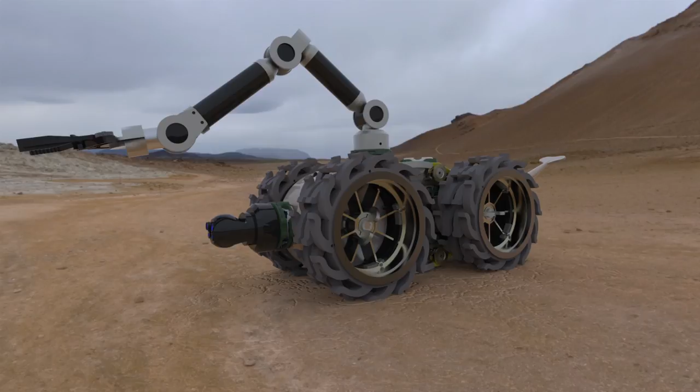Solid Edge ST8 strengthens its industry leadership and efficient 3D product design. This latest release further integrates synchronous technology into proven large-scale assembly modeling techniques.

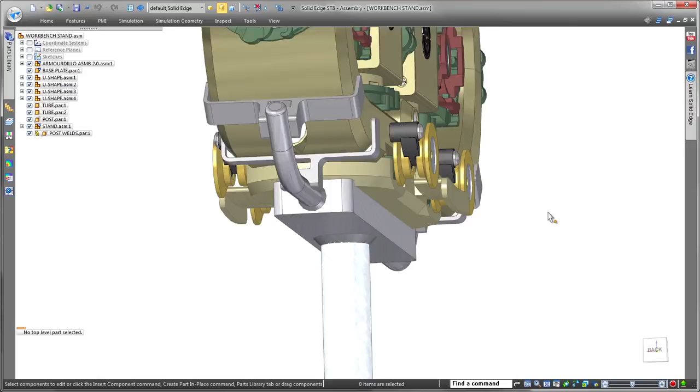In this demonstration, we'll make several changes to a workbench stand supporting a recovery robot's chassis. New time-saving file open functionality identifies top-level assembly files, letting you quickly retrieve the overall assembly without having to search through a long list of subassemblies. Here we'll open the top-level workbench stand assembly.

Leveraging the power of synchronous modeling speeds design changes. To stabilize the workbench fixture part, we'll widen its base just by dragging its side face, and we'll define a small offset to get an exact fit.

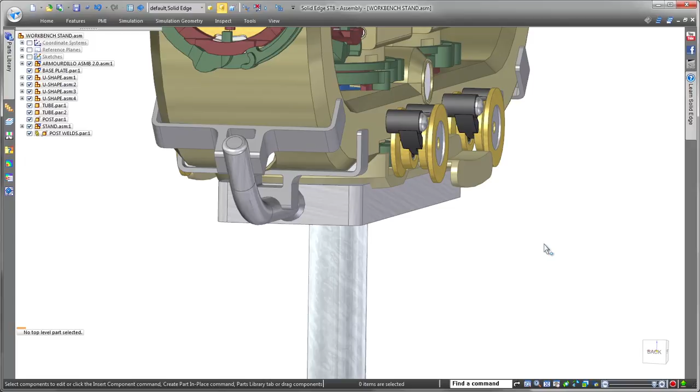Solid Edge specializes in providing all the tools you need to work on a part within an assembly. We'll activate the base plate part to implement some changes. Notice how Pathfinder indicates your active position within the assembly structure.

Here, we want to remove material from the base plate to ensure a tight fit between the stand and robot chassis. We'll subtract material using the bottom of the chassis.

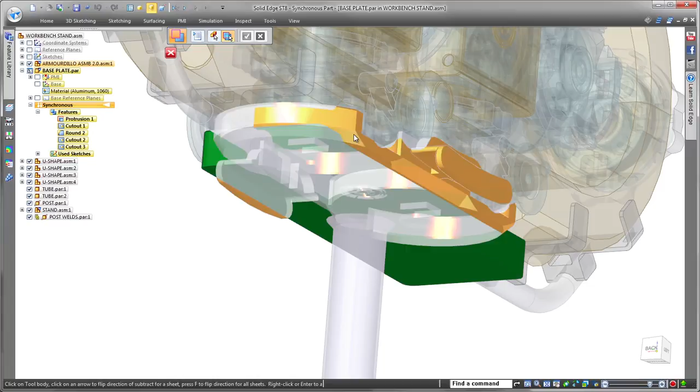Access to the top-level assembly components was crucial to get the correct result. Notice the result after removing material using the top-level assembly components. A perfect fit. This approach produces accurate results and maximizes your productivity.

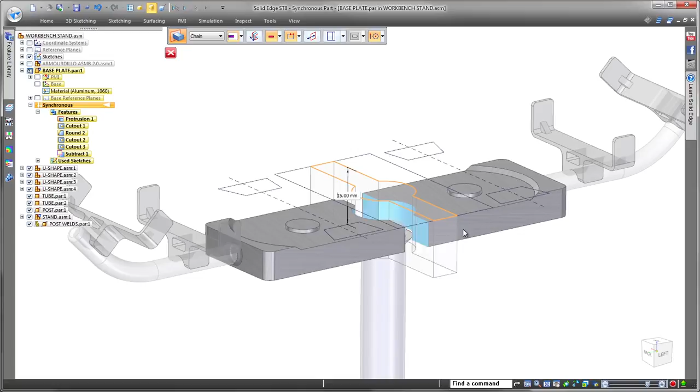Design reuse averts time-consuming and costly model recreation, so we'll make use of geometry already present in the top-level assembly. Watch as we use sketches from the workbench stand to create a relief pocket on the base plate and remove unnecessary features. Finally, we'll add some rounds to remove sharp edges and finish the base plate.

With Solid Edge, working on subsystems and components within a large assembly is efficient and very fast.

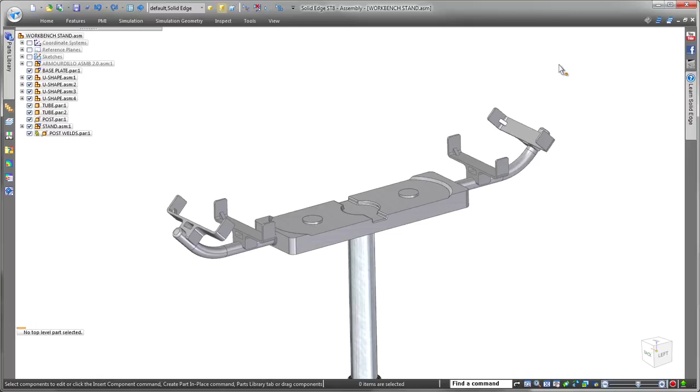Streamlined weldment design is delivered in Solid Edge ST8. The ability to create weld beads within the part environment gives you flexibility with the use of standard weld bead commands, part modeling techniques, or a combination of the two.

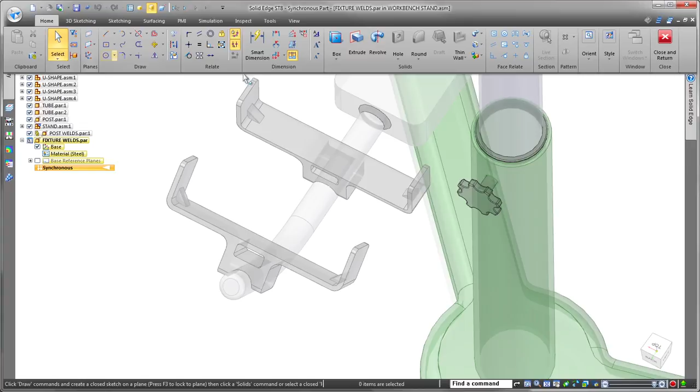With weld beads defined in the part environment, you have full control of the material definition, appearance, and access to their mass properties. We'll continue to work in a top-down design scenario, as this gives easy access to the assembly components. Here we'll create weld beads between top-level components while in the part environment.

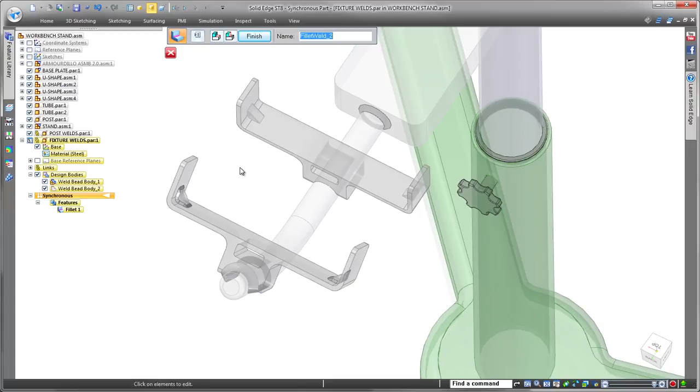Their material is defined in the part, not the assembly. Now that we've applied weld beads to one component, we can expedite the welding process to the other side with the use of duplicate part. Now that's easy, it's fast, and it greatly streamlines the welding process.

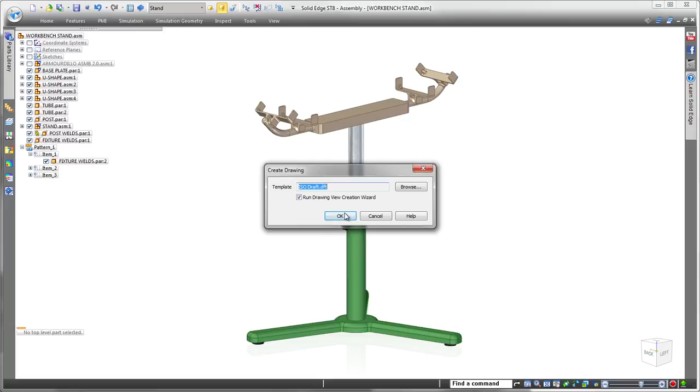When you need to efficiently document your weldment scenario on a drawing, Solid Edge shines. Watch as we place standard and auxiliary views with minimal mouse clicks. We'll apply a cutting plane to the front view, and from that cutting plane we'll pull a detail view to note information about the weld beads.

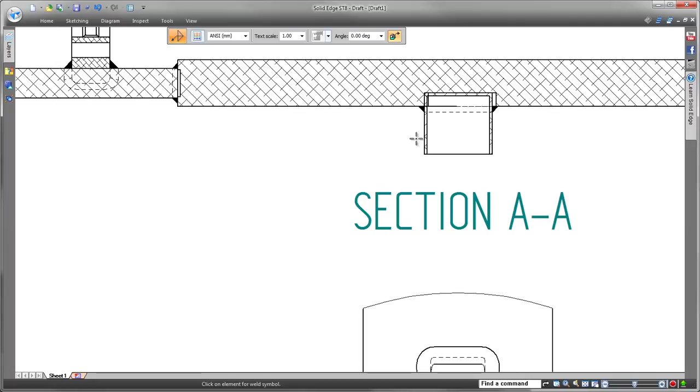Since we can extract weld bead information directly from the model, we save time and cut costs by avoiding duplication of effort. If a design change is approved, it'll be reflected throughout Solid Edge.

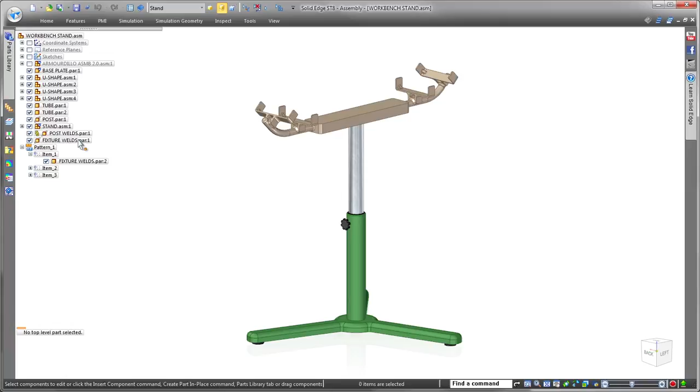Watch as we return to the assembly and increase the weld bead size between the post and fixture. Back in the draft environment, we're notified that a dimension moved, but also notice in the parts list the weld bead weight and cost also reflect the changes.

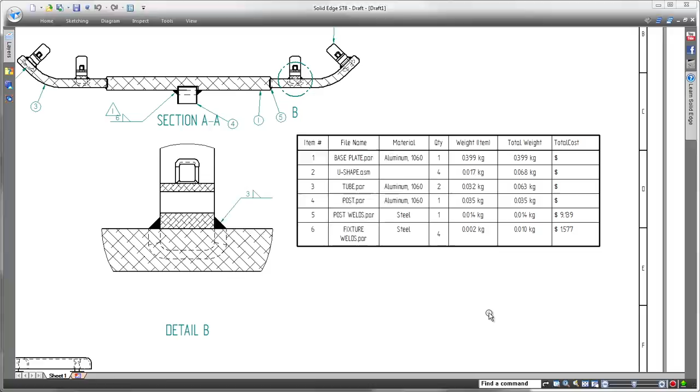Solid Edge with synchronous technology frees you to design more productively with the best tools and technology to get your job done right the first time.

Solid Edge. Design better.